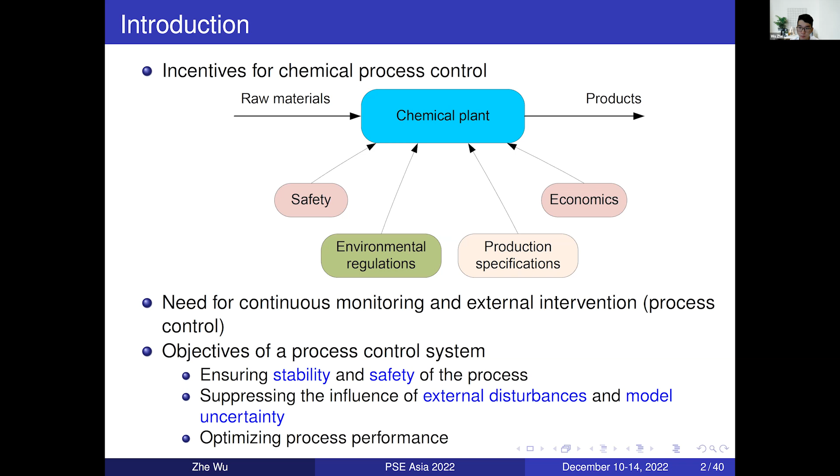However, PID control has its limitations. For example, the tuning of PID parameters, Kc, tau I, and tau D, typically needs a process model. However, deriving such a process model could be challenging for real-world systems. Also, PID control doesn't account for interactions between process variables, constraints, and nonlinear behavior. Therefore, in the 1970s, advanced model-based process control was proposed.

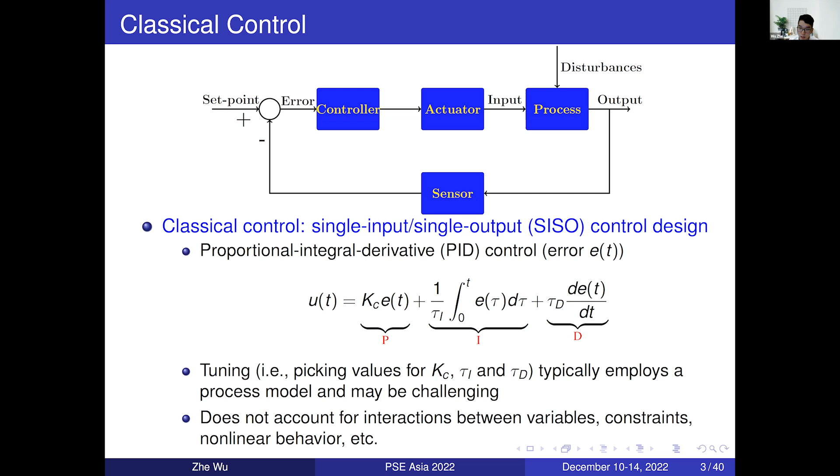In model-based process control, we have a model that describes the process dynamics, which basically captures the variation of process state variables in time due to disturbances, inputs, and interactions between process state variables. Compared to PID control, model-based control can improve closed-loop performance because the model accounts for inherent process characteristics such as nonlinear behavior and multivariable interactions. Also, model-based control can characterize the limitation on achievable closed-loop stability, performance, and robustness.

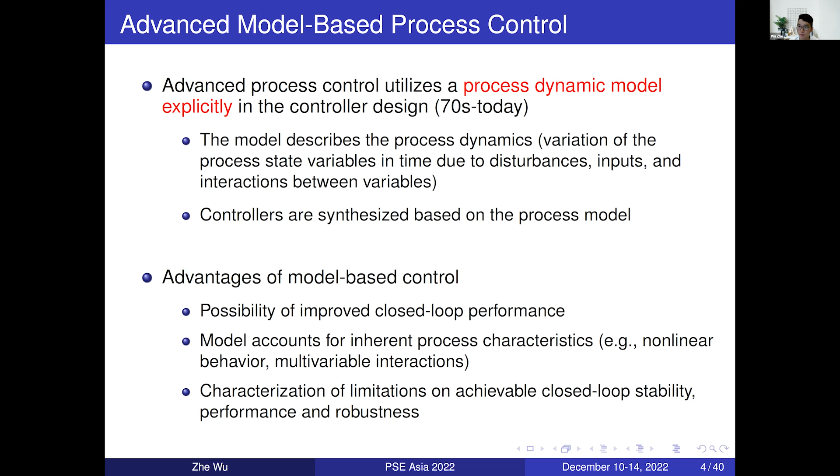MPC is implemented in a sample-and-hold fashion, which means at every sampling time, we solve the MPC optimization problem, we derive the optimal input sequence, but we only apply the first control action to the next sampling period. Closed-loop stability under Lyapunov-based MPC means convergence to a small neighborhood around the origin.

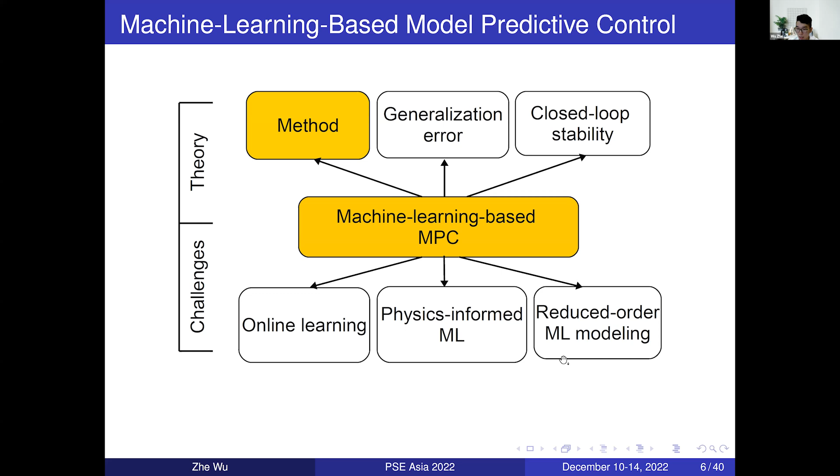And regarding the practical challenges, we will also discuss online learning, physics-informed machine learning, and reduced-order machine learning modeling to address the issues of model uncertainty, data scarcity, and curse of dimensionality, respectively. So we'll first introduce how to build a machine learning model that can be integrated with MPC cost functions and constraints to solve the optimization problem. And when we substitute such a model into the MPC, we can also prove the closed loop stability is guaranteed in the probability sense.

So f, g, and h are sufficiently smooth functions. The measurements of process state x are available at each sampling time, while delta is the sampling period. We also assume that the steady state of the nominal system is at the origin. And lastly, we assume there is a controller phi(x) that can render the origin of the nominal closed loop system exponentially stable.

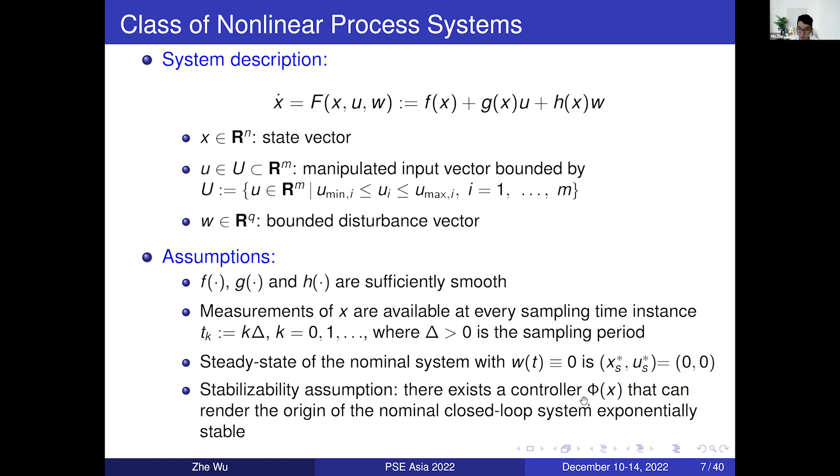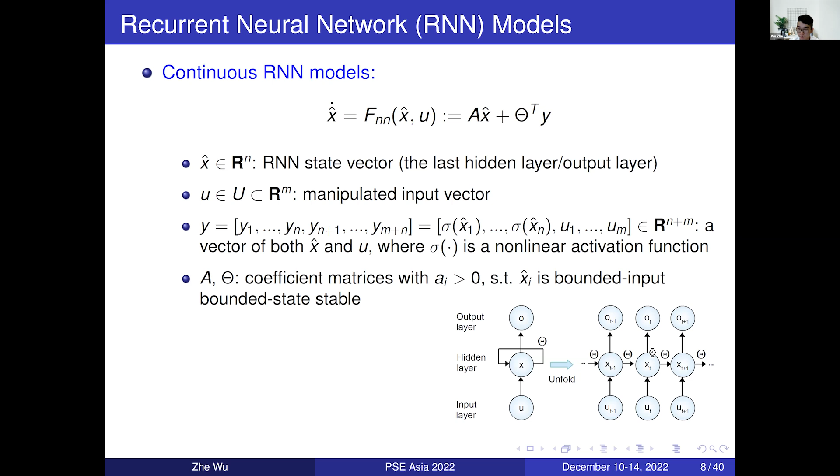And our outputs are the predicted states at t_k plus P_NN, where P_NN is the prediction horizon of the neural network model. So for the recurrent neural network, all the data points between t_k and t_k plus P_NN are taken as the internal states. And therefore, our model will provide a prediction of the state trajectory over this prediction horizon.

And here, I also want to mention that the control theory will inform the training process in the sense that the closed loop stability condition will impose some constraint on the RNN training process, such that the RNN model that we derive can ensure closed loop stability. And we use Python and TensorFlow Keras to build our machine learning model and ultimately incorporate the machine learning model in MPC, where IPOPT is used to solve the optimization problem.

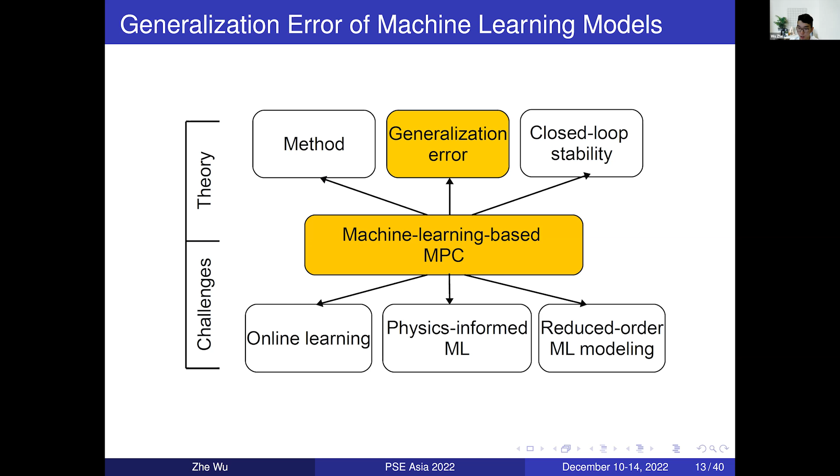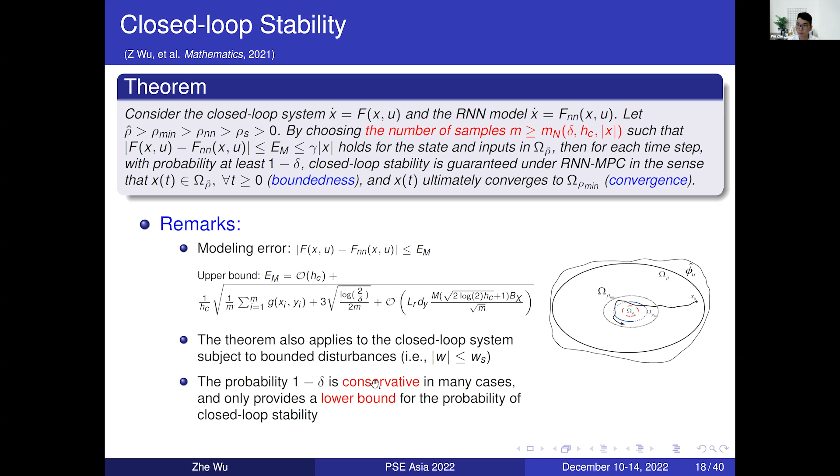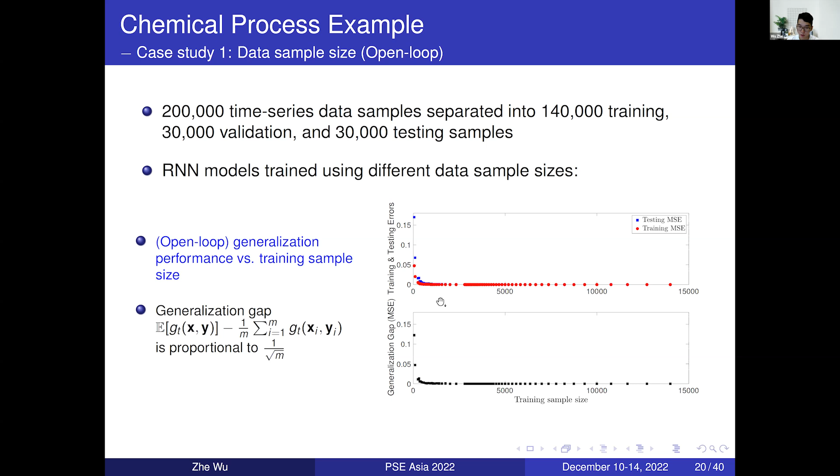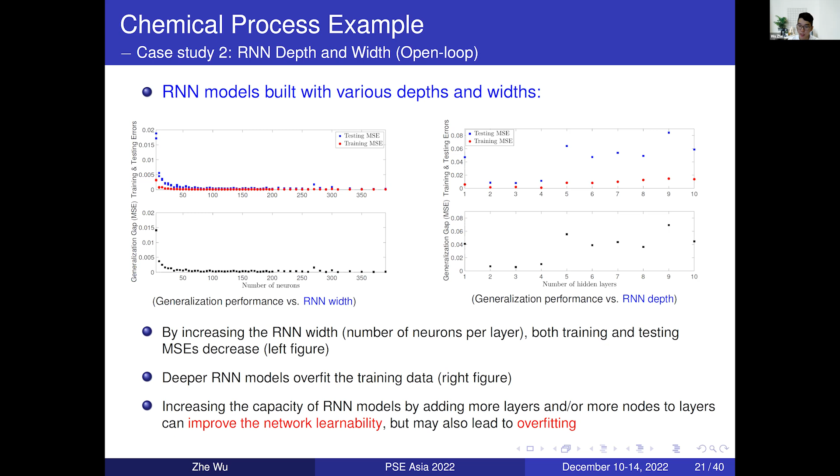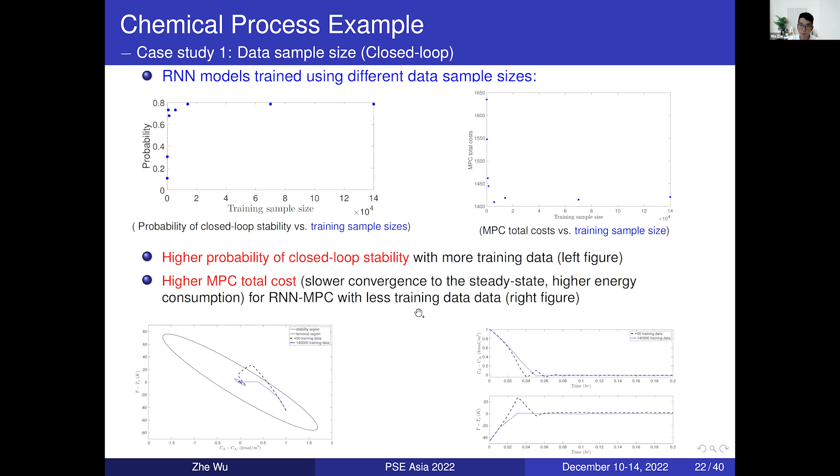Okay, so far we discussed how to build a machine learning model, specifically a recurrent neural net model for nonlinear dynamic systems, and how to incorporate the RNN model within MPC. And for that, we discussed the generalization error and closed loop stability in the probability sense. So next, I will discuss a few practical challenges when we apply machine learning-based MPC to real-world systems.

So the first challenge is model uncertainty, for which we will use online learning to improve the machine learning model using real-time process data. So we know offline learning models are generally developed using historical data from past normal operations. However, system dynamics of real-world chemical processes may vary over time due to model uncertainty or mode transitions. Therefore, online learning updates the machine learning model to capture the latest process dynamics using the real-time data.

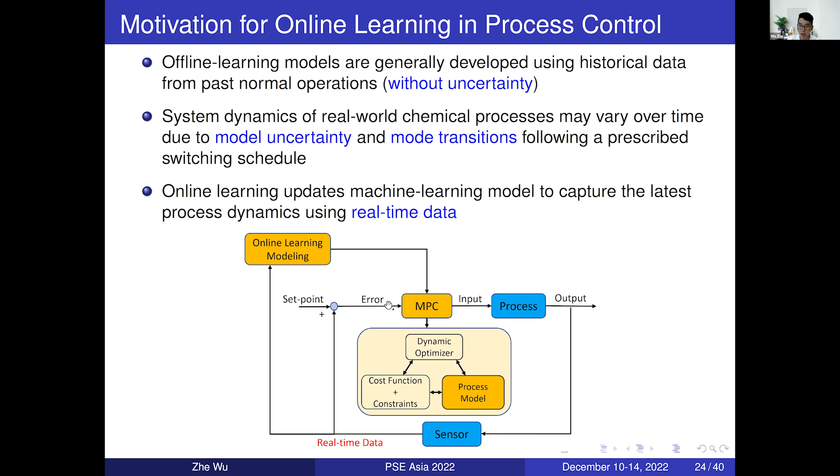So the schematic of online machine learning-based MPC is very much like the offline machine learning-based MPC, except that we have a database that stores the real-time process data to update our model online from time to time. So here we consider the nonlinear process system with a disturbance term. We assume this disturbance is not sufficiently small, such that closed loop stability cannot be guaranteed in the presence of such model uncertainty.

So we have the following two mechanisms to update our models online. First, the event-triggered RNN update says if the decreasing rate of the Lyapunov function does not meet our predefined decreasing rate epsilon W, then we will update the RNN model. And the second mechanism is based on the calculation of prediction error. So we calculate the accumulated error between the predicted state XP and the real measurement X.

So if this prediction error exceeds some threshold ET, then it means our RNN model cannot capture the latest process dynamics. Therefore, we will use the most recent process data to update our RNN model. So these two mechanisms, the event-triggered or error-triggered RNN update, can update RNN models when our RNN model is detected to not perform very well.

And next, we will also discuss the generalization error for our online learning models. So online learning basically follows the offline learning mechanism in the way that we have a set of T labeled samples. Unlike offline learning, where we train the model using the batch of the entire training set, for online learning we train the model using the data sequence one by one. So we have an initial model, and every time we receive one input from the real-time process data, we do the prediction, receive the true output, and based on the loss, we update the model.

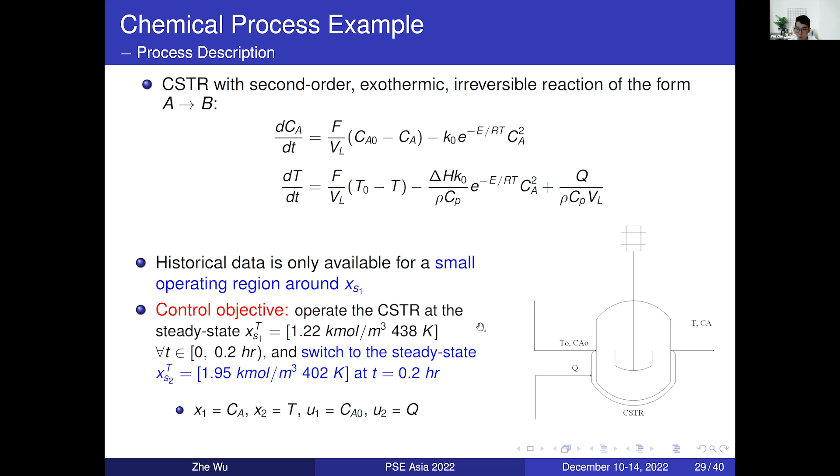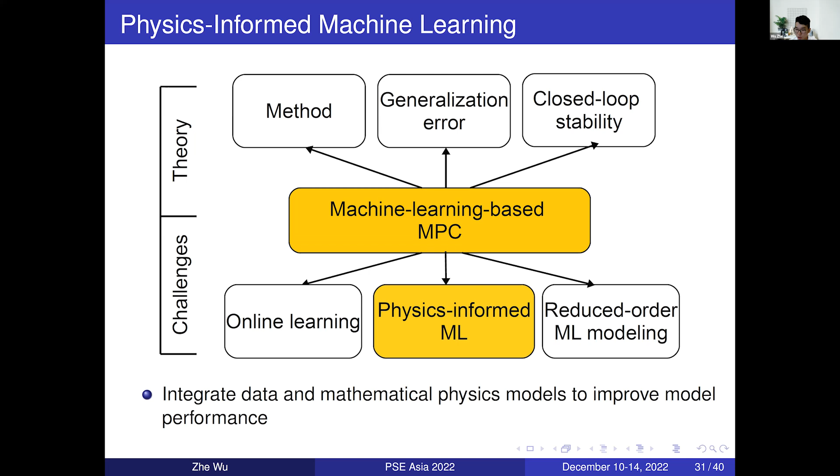Okay, so next, I'd also like to briefly introduce physics-informed machine learning. So far, all the machine learning modeling techniques we discussed are essentially black box modeling. So we purely rely on the process data to build a machine learning model. However, as chemical engineers, we always know some a priori process knowledge. Therefore, a smarter way to build a machine learning model is to integrate data and some physical knowledge to improve the model performance. So here we consider the chemical process described by the following nonlinear dynamic system.

So one of the fundamental challenges of machine learning models is that they cannot extrapolate well and usually require big data in the training phase. Such a requirement may be unavailable in practice. Therefore, we propose a physics-informed machine learning model to improve the generalization performance.

So in this way, the physics-informed machine learning model can reinforce learning through the use of the physics-based model. And it can extrapolate better outside the training samples because of the physical model that we use as the regularization term. And overall, the physics-informed machine learning model can improve its interpretability.

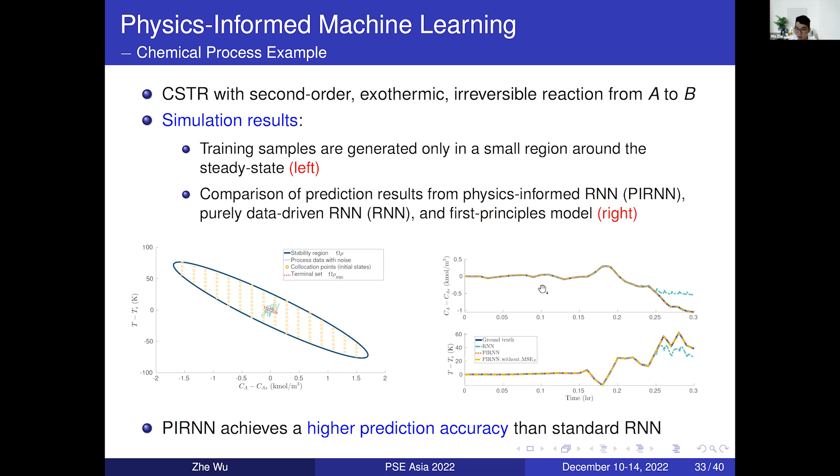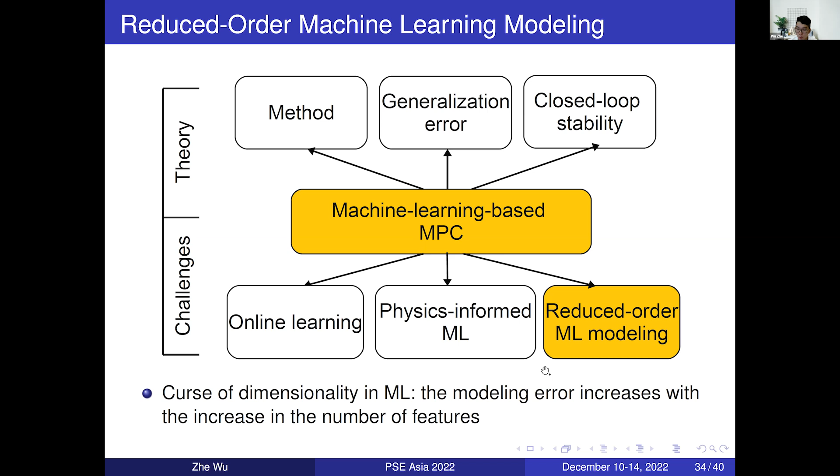So lastly, I'd like to spend a few minutes discussing the reduced order machine learning model to address the challenge of the curse of dimensionality, which means the modeling error will increase with the number of features. The curse of dimensionality happens when we use machine learning techniques to model a large-scale chemical process. To address this issue, we propose to integrate an autoencoder with the RNN model.

So the autoencoder, AE, is a dimensionality reduction technique consisting of an encoder and a decoder. The encoder basically maps the input features X in a high dimensional space to the low dimensional space, which we also call the latent space. And the decoder converts the reduced order state in the low dimensional space back to its original high dimensional space. The autoencoder itself is unsupervised learning because it minimizes the reconstruction error, X minus X hat.

So to integrate RNN with the autoencoder, we embed the RNN model between the encoder and decoder. Basically, the RNN model takes the reduced order state X_R with the manipulated input U to predict the future state X_R tilde in this latent space. After we get the predicted states, we can use the decoder to map them to the original high dimensional space such that the states have physical meaning.

So the benefit of embedding the RNN model within the autoencoder is that now we can train and run our RNN model in this low dimensional space, which can save us a lot of computation time.

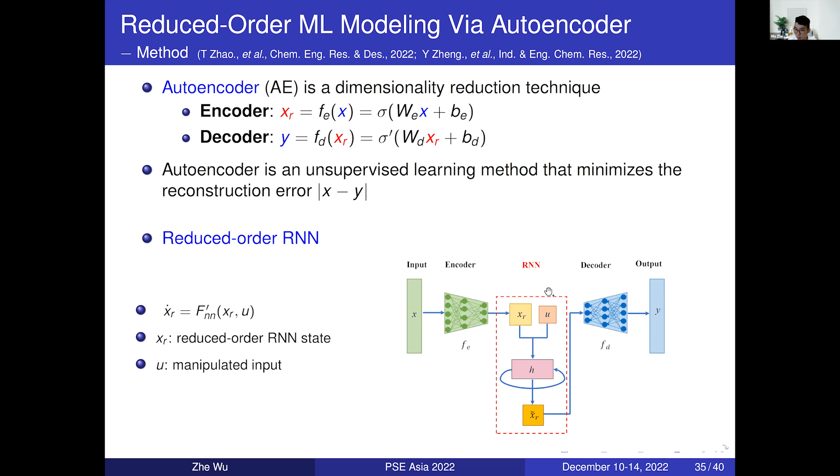So in this work, we prove closed-loop stability of the autoencoder-based RNN. The general idea is that originally we have an operating region in high dimensional space, and then we can map this region to a low dimensional space. Our RNN model is developed for this low dimensional space only.

And if we can control our state within this Omega rho hat, which is the new operating region in the low dimensional space, then we can prove that the actual state in the original high dimensional space is also bounded in a closed ball around the origin. So closed-loop stability is maintained. I will skip the detailed proof here, but the idea is that our autoencoder needs to be trained very well with a bounded generalization error.

So lastly, I will introduce another method for reduced order machine learning model. So autoencoder belongs to feature extraction, which generates a new reduced set of features derived from the original data set. And in addition to feature extraction, feature selection is another important category of reduced order machine learning model. So unlike feature extraction that generates a new set of features, feature selection will just select a subset of existing features that excludes irrelevant or redundant features. Therefore, compared to feature extraction, feature selection improves the interpretability of input features since it's just a subset of the

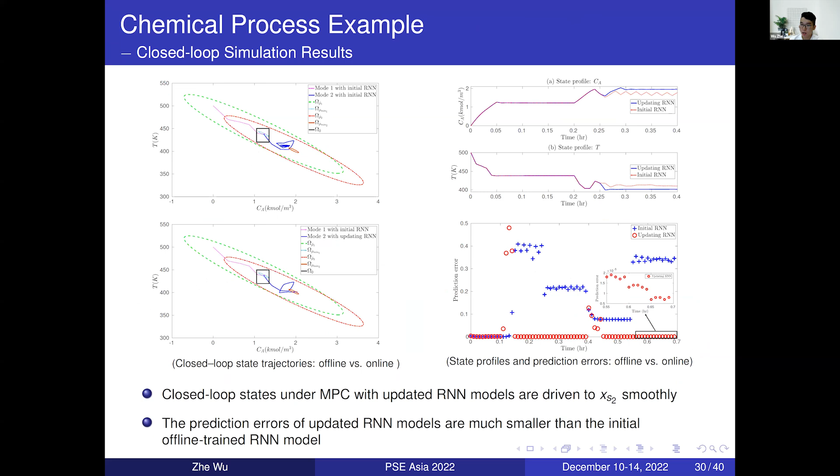Let me show you here. Yeah. Then we basically need to characterize this operating region omega rho, because only in this region closed loop stability is guaranteed. So here's the process.

We first derive the RNN model using the training data set, and then based on this model, we design the Lyapunov function V and test if V dot is negative within this operating region omega rho. So if it's negative, then we think this is a good Lyapunov function. If not, we just change the P matrix.

So our Lyapunov function is designed in the way that X transpose times P times X. So it's in a quadratic form. So we basically change the P matrix to make sure that within our operating region, V dot is negative, such that closed loop stability is guaranteed. Okay, so it's based on the linear Lyapunov functions, the way I understood. It's in a quadratic form.

Yeah. X. Yeah. Thanks. Yeah, thank you. Yeah, that's right. Okay, go ahead. Thank you for your wonderful talk.

So, picking up on the question that was asked earlier, since you do open loop simulations for your training data, I presume you cannot perhaps take inputs wherein the system becomes unstable. But if you take it under closed loop, you can perhaps design a controller that can stabilize the system. So if under closed loop control you were to access those zones wherein it's open loop unstable, because it's a non-linear system, unlike a linear system wherein it's guaranteed for a given state, how do you traverse that? How do you deal with that?

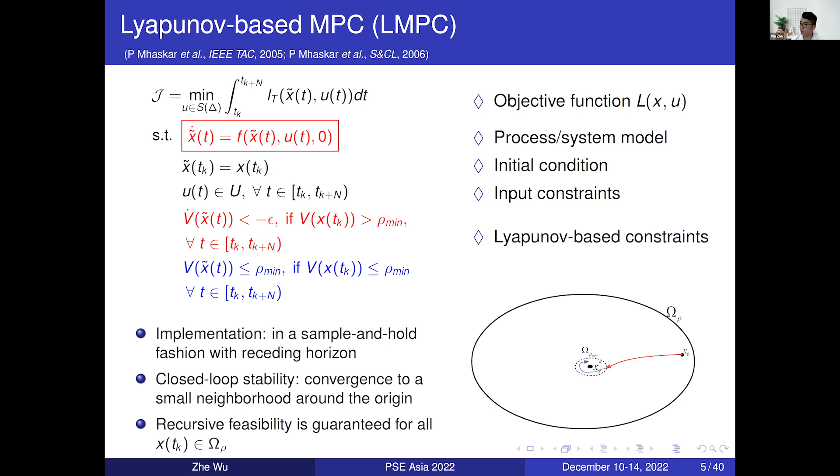So P_NN could be very small, just one sampling period, right? So for one sampling period, even if the system is unstable and you start from some initial condition, the system state will not go too far. So by doing so, we can recursively run our RNN model to predict a very long trajectory. The RNN model itself can be developed to predict a very short time, but by recursively applying the RNN prediction, we can still derive a very long predicted trajectory.

Just another quick question, more on the lines of practice. Even if you have a simple system like a CSTR, is there any empirical rule to choose the prediction and control horizons for a non-linear MPC as opposed to a linear MPC? What happens to the computation time, etc.? Sorry, can you repeat your question? I said, even for something as simple as the CSTR example, as opposed to the conventional linear MPC methodology, when you use RNN, what happens to the prediction and control horizon? How do you choose them? Do you see any trend? Can you comment on that?

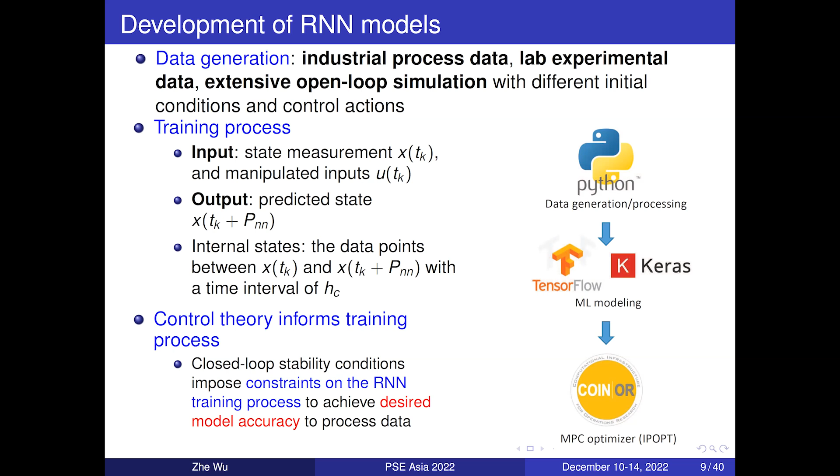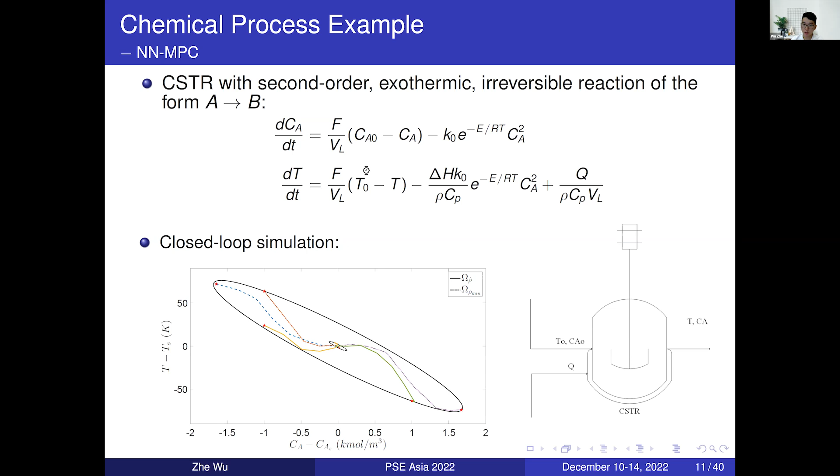Yeah, that's a good question. I didn't show it, but this is the result from our AIChE paper in 2019. In that paper, we also compare our model with a linear state space model. We show that the linear state space model predicts well for a small region around the steady state, but it cannot capture the nonlinear dynamics for states far away from the steady state. So for CSTR, the benefits may not be that obvious because it's a very simple case, but we also did other examples like a crystallization process, which is highly nonlinear, where the benefits of our model would be better.